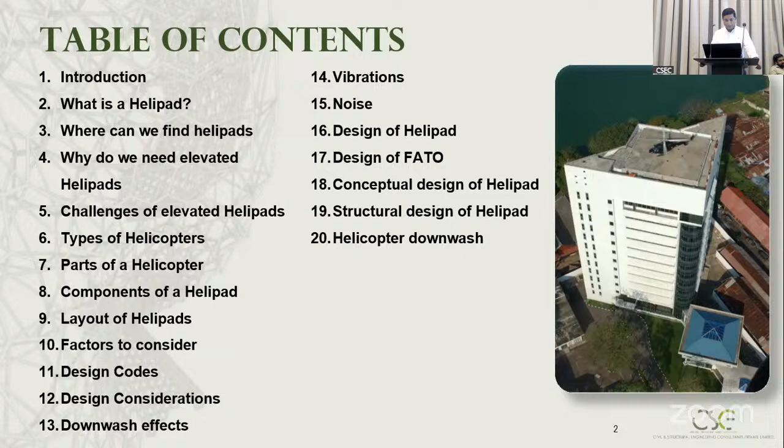Parts of a helicopter. Components of a helipad. Layout of helipads, factors to be considered, design codes, design considerations, downwash effects, vibrations, noise, design of helipads, design of FATO that is final approach and takeoff area, conceptual design of helipads, structural design of helipads, and helicopter downwash.

So let's move into the introduction part. When you look at the aviation sector, there are two types of aircraft available, based on their lift mechanism. The first one we call fixed wing aircraft. The fixed wing aircraft generate lift through forward motion and fixed wing. To operate fixed wing aircraft, you need a runway or airstrip.

For example, from the Sri Lankan point of view, the national carrier, Sri Lankan Airlines, uses A320, A330, A340, and so on. In addition, from the Air Force inventory, AN-32, C-130, and also the jets come under this category, that is Kfir, MiG-27, and so on.

The other category is rotary wing aircraft, basically what we call helicopters. A helicopter generates lift by rotating its wings in a circular motion. The significant difference is the helicopter can take off and land vertically, so there is no requirement to have an airstrip or runway. It needs only a basically flat platform, an obstacle-free area, because it can take off and land vertically.

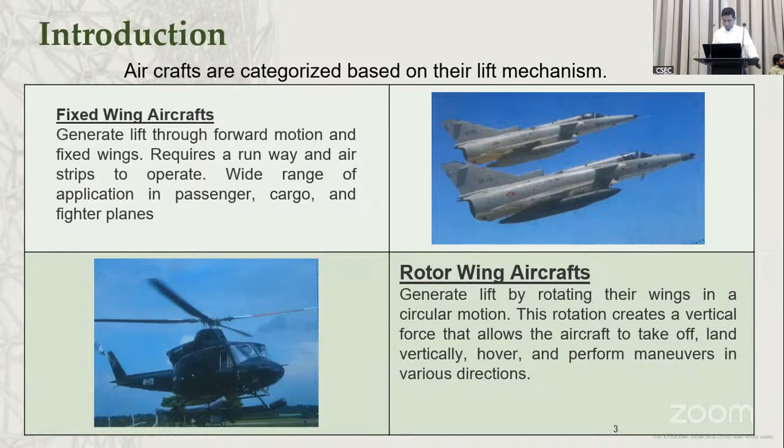Now let's see the definition of the helipad. It is the area designed for helicopters landing and takeoff, generally marked with an H to help the pilot easily locate the area. That is a standard. Generally we mark a capital H letter so that pilots can identify the helipad from a reasonable distance. Helipads are constructed generally with concrete, asphalt, and steel.

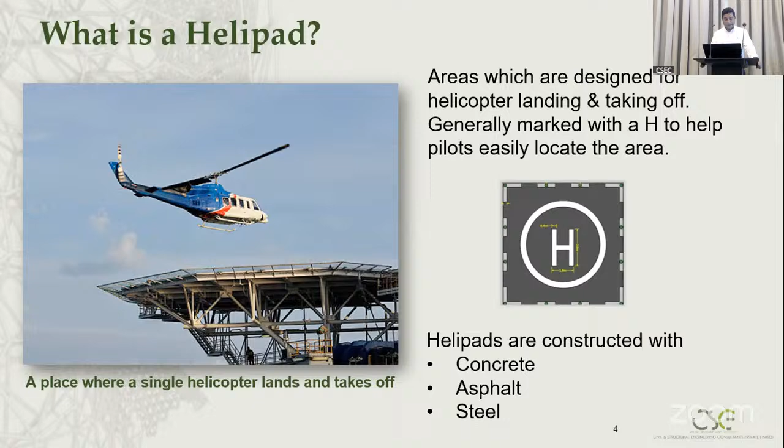Now, gentlemen, we'll see where can we find the helipads. Of course, on the ground. Ground helipads are very popular, and you can find them even in military setups, in the field. We will have a clear area. You can see in some grounds also, for emergency situations, we will land and position aircraft. But today we are going to give more details about rooftop helipads.

Other helipads are offshore helipads, oil stations, and also helidecks, especially on ships. And finally on rooftops. So we are going to discuss rooftop helipads in more detail today.

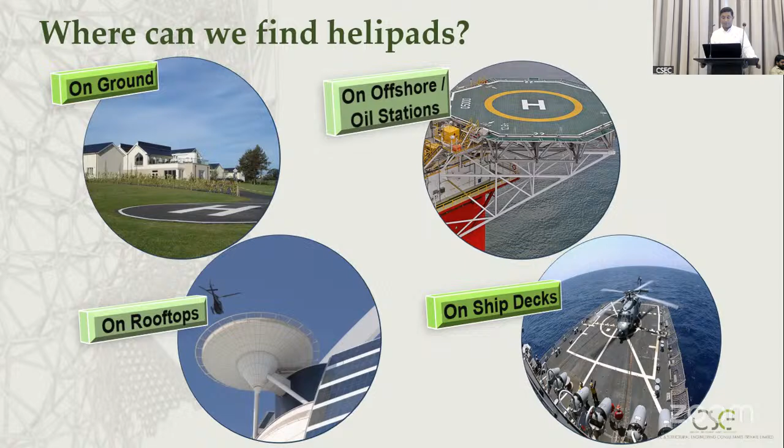So, ladies and gentlemen, why do we need elevated helipads? These are the plus points, mainly the most popular reasons. Due to these things, today's construction industry is very concerned, and rooftop helipads are very popular.

Convenience: direct helicopter access to the building, which is useful in case of emergency situations and VIP transport. If you have direct access to the building, that is a very good advantage, especially for emergency situations, for hospitals and high security zones. This is very important, and also for VIP transport because you have direct access.

Also, space saving. When you are designing a high-rise building in city limits, given the scarcity of land, you can use rooftop helipads. The other thing is security—maximum security with direct access to the building. As I explained earlier, this is very important.

And the plus point is enhanced visibility. Due to the situation of being at the top of a high elevation, it provides great visibility for pilots for approach and takeoff.

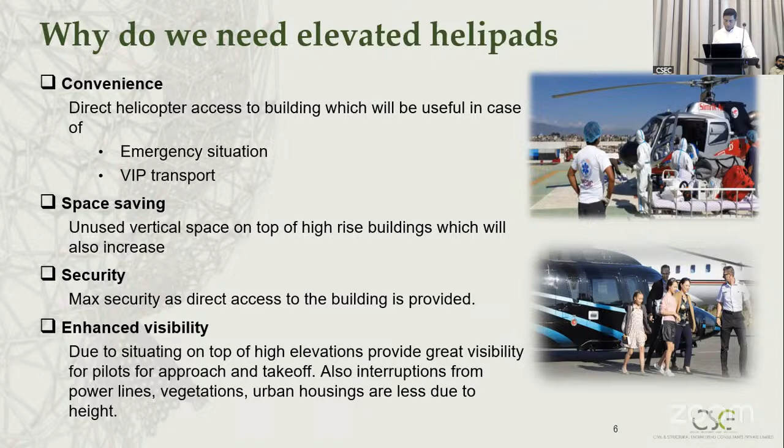Those are the plus points, and there are minus points also, which we call the challenges of elevated helipads. Of course, there are structural challenges, the weight and vibration during takeoff and landing, but I am not going to discuss those because Engineer Shiromal will discuss those things.

Noise and safety concerns: helicopter operations generate considerable loud noise, which can cause distress to building and neighborhood occupants. Especially the helicopter startup produces a lot of noise, and also when taking off and landing they use maximum power, generating loud noise which is a great inconvenience to the occupants of the building as well as the neighborhood. Then the other minus point is airspace restriction.

Generally, we construct rooftop helipads in the city, so there are high security zones also, from the Sri Lankan point of view. There are also regulatory requirements; they give specific flight paths for approach and takeoff, and directions due to certain reasons. For example, you can't fly over the parliament and president's house, so the pilot has to approach the helipad from a different direction.

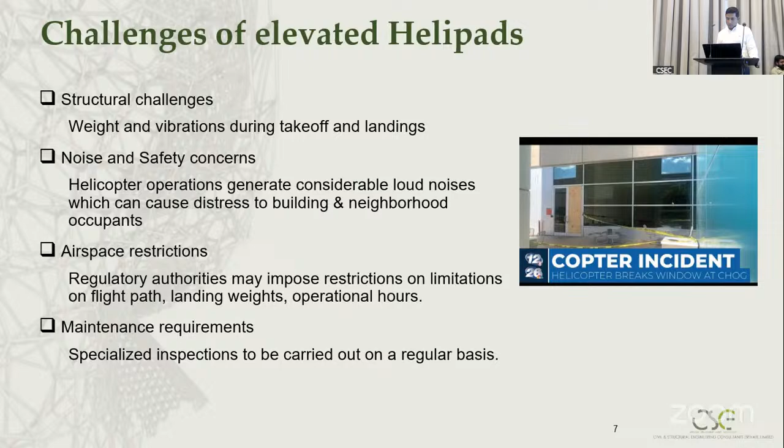This is also very important, because when designing a helipad, you should know what type of aircraft you are going to use, because the specifications differ from helicopter to helicopter - weight difference, speed difference, and a lot of things to consider. So you should have at least some idea about what types of aircraft are available in Sri Lanka and what the common helicopters are. I will go through the very common helicopters in Sri Lanka at the moment.

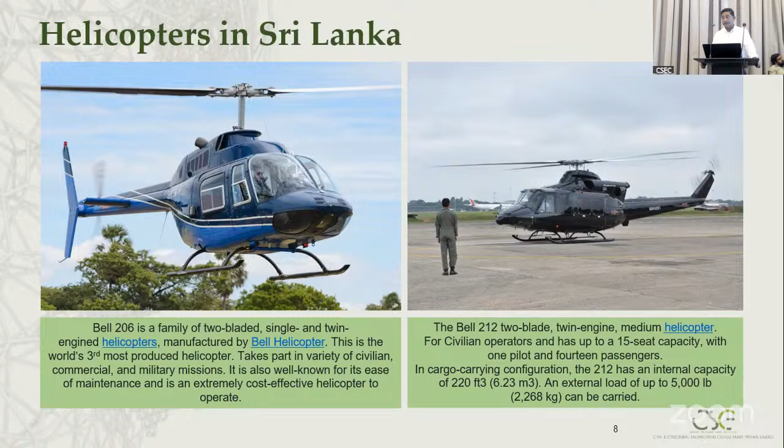At present, you can see the Bell 206, the single engine aircraft, also called Jet Ranger. Then there's the Bell 212, a passenger and cargo aircraft, again a twin engine aircraft. Then the Bell 412, again a passenger aircraft, generally used by the Air Force for VIP flying and casualty evacuation. And also the Mi-17, a big large Russian-made helicopter - this is a cargo helicopter actually, but a VIP version is also there. So about four of these come under the Air Force inventory.

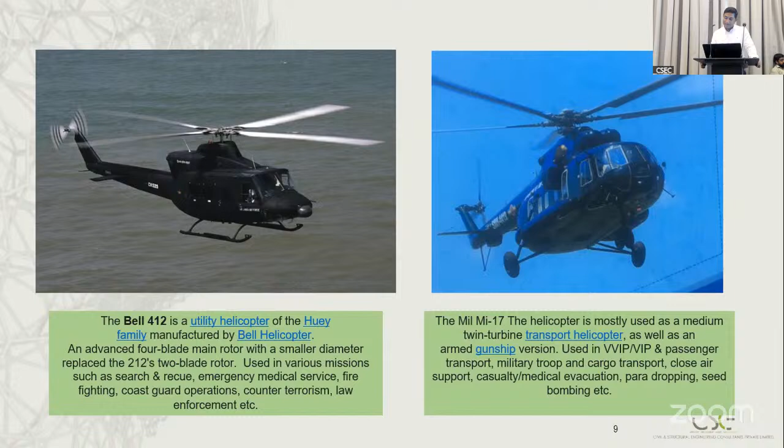In addition to that, the civil sector also operates some helicopters, so we have to think about that also. There's the Robinson 66 passenger helicopter, again a single engine aircraft, and Eurocopter helicopters also, which we call Airbus helicopters. You should know this information, because when designing a helipad, you should know the specification of the helicopter; otherwise it's very difficult.

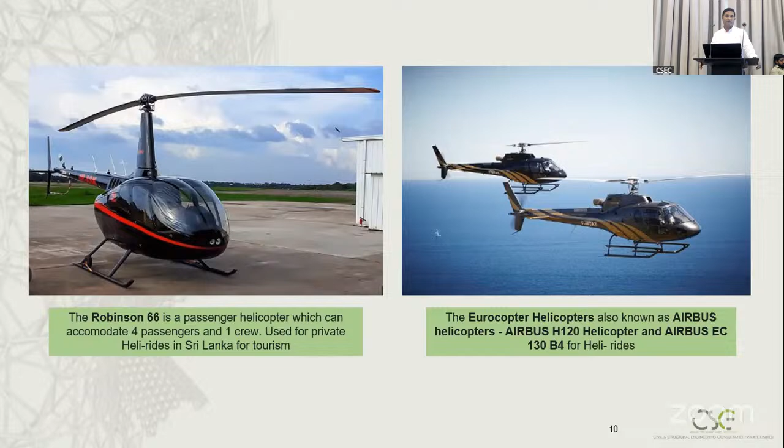Now we'll go to the parts of a helicopter. This is also very important because some words we use may be new to you, and I want to refresh your mind before you go to the design part, so that you will easily understand Mr. Shiromal's part.

These are the basic parts of the helicopter. You can see the main rotor - generally the main rotor may have 2 blades, 4 blades, 6 blades, or 8 blades, depending on the helicopter type. The main rotor is connected to the rotor mast, and the rotor mast is connected to the helicopter main body. Then you can see there is a place called the cockpit, where the pilots are, and all operations are done through that area.

Then under the fuselage - the belly, or the body, you can say - you can see the landing skids. All the weight transfers through these landing skids to the helipad. Sometimes you will get landing wheels as well, depending on the aircraft. As I showed you, the Mi-17 has wheels, whereas the 212 has landing skids. So accordingly, you can calculate the weight for your design work.

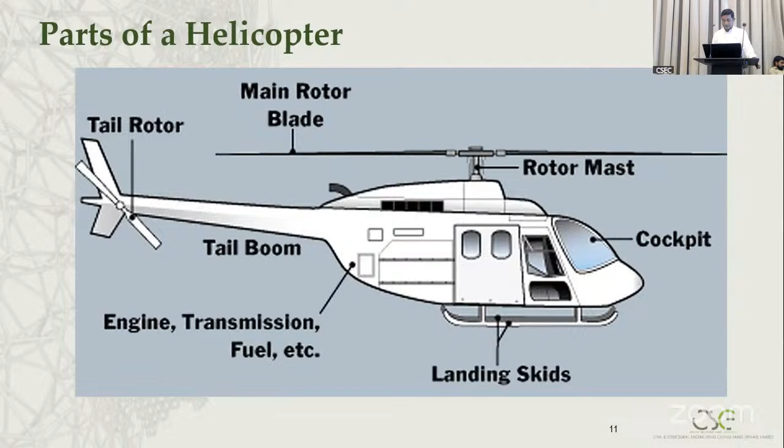Now, gentlemen, we'll go through the components of a helipad. Basically, as I mentioned, it's an obstacle-free area. For easy understanding, you can see 3 squares. Outside the square, you can see something called a wind sock. The wind sock is some kind of apparatus to identify the wind direction for the pilot.

Generally, the aircraft will take off and land against the wind, so wind direction is very important. That is generally installed outside the safety area. Then you will have the safety area. Within the safety area, you can see another square called the final approach and takeoff area. The pilots will approach this square from a reasonable distance before they touch down.

Then inside the final approach and takeoff area, you will have another square called the touchdown and lift-off area. When the aircraft approaches through final approach, it comes to the touchdown area, and on takeoff it goes through the takeoff area. Inside the touchdown and lift-off area, you can see a circle, called the touchdown and positioning circle. Finally, the aircraft will come to this circle, and you can see the letter H as I mentioned earlier. The pilots will touch down in this area, and the aircraft will be positioned there.

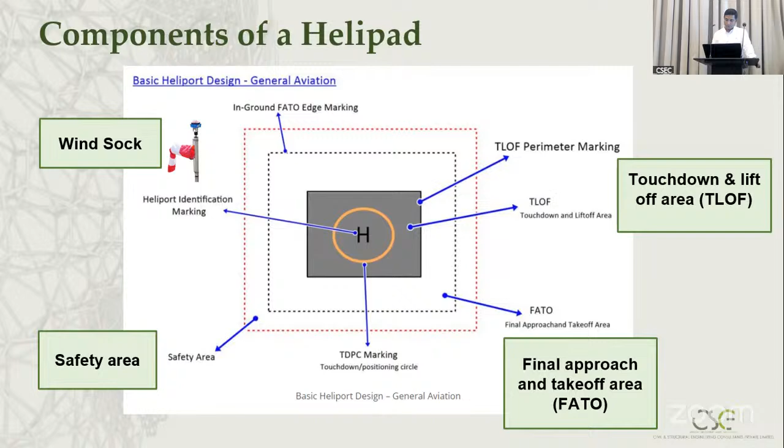Now let's see the layout of a helipad. This is also very important. Basically, as I mentioned, it's the obstacle-free area. If you take the overall length of the helicopter as D, the safety area should be 3D, 3 times the helicopter length. Inside the safety area, you get the final approach and takeoff area, that is 2D. Then finally D, the overall length of the helicopter, is the aircraft positioning circle, where the letter H is also located.

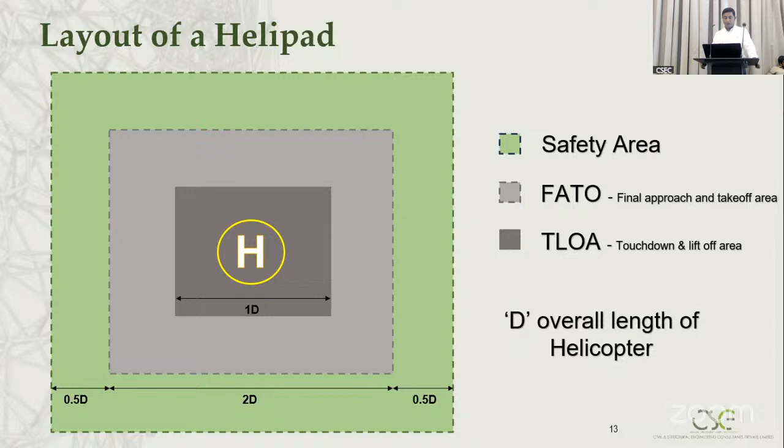So when designing the helipad on rooftops, these factors must be considered. These are the main factors. There are some other factors also available, but these are the main ones to be considered when designing a helipad on rooftops: markings, lighting for night flight operations, fire safety, and picketing points. On the right side of the picture, you can see the Bell 412 aircraft positioned at the former Air Force headquarters building at Slave Island.

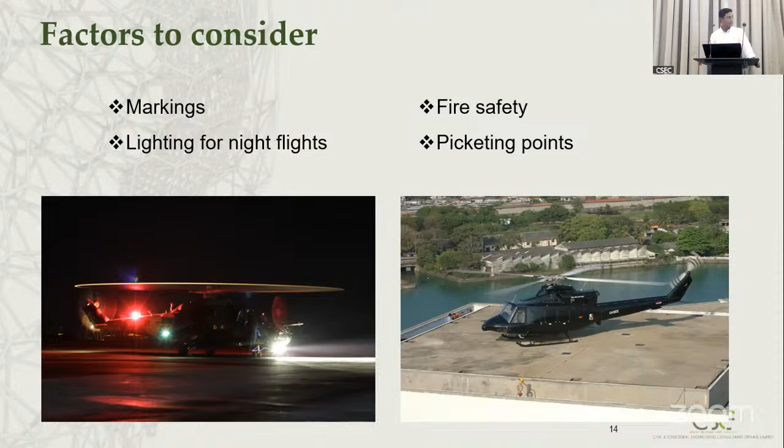And also some areas to operate firefighters and other equipment must be considered. Also, not in Sri Lanka, but in other countries, they use sprinkler systems for helipads. It's a bit expensive, but now it is commonly used.

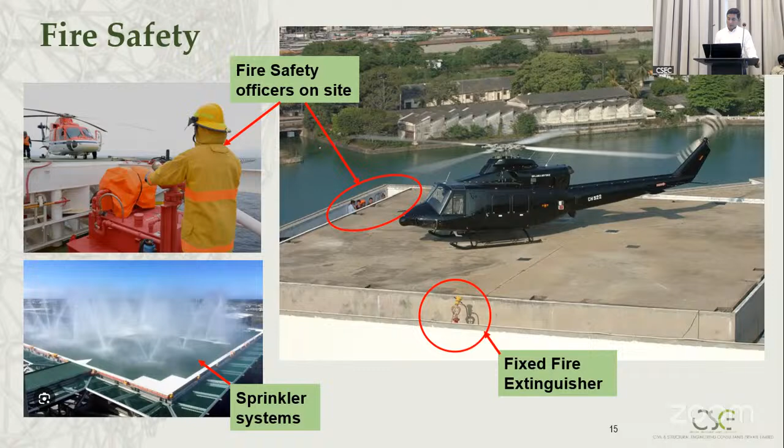Then, the picketing point. As you know, sometimes the aircraft may come, touch down on the rooftop helipad, and take off again. But sometimes we have to keep the helicopter there for a certain time, maybe due to some snag or security reasons. In that case, you keep your helicopter positioned on the rooftop, and it becomes very critical due to winds. So you have to have picketing points, because in turbulent situations the aircraft could be moved, and bad effects can result from high winds. In that case, you have to anchor your aircraft to the ground, to the helipad.

So this requirement, the manufacturer will give the layout of the picketing points arrangement according to the aircraft, because you can't anchor the aircraft as you want. Some hard points are available in the helicopters, sometimes only fiberglass and plastic, very soft material parts are there. So you have to identify the hard points, and according to the hard points, they will give the picketing point arrangement. The picketing points are basically the anchoring point. So any aircraft you design for helipads, you have to refer the manufacturer specification for picketing points specifications and the picketing points layout.

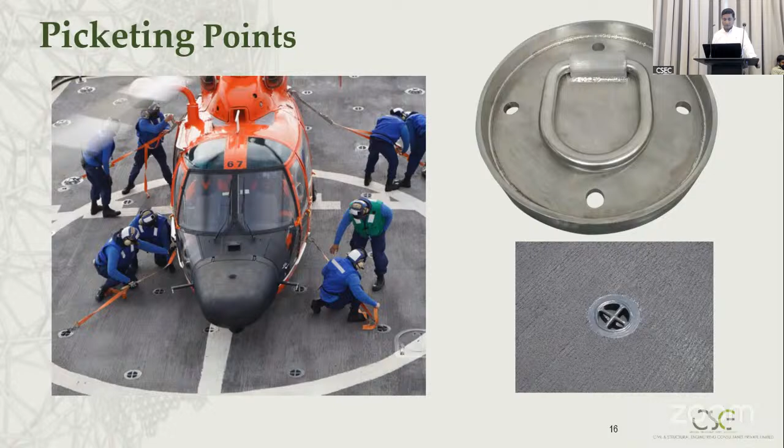Another thing is the markings. The marking is also very important. This is the regulatory requirement, so you have to mark the helipad as per the regulatory requirements. These are the basic markings: the helipad name, you can see any color, ICAO. For example, this indicates ICAO.

Then you can see touchdown and lift-off area marking, generally a white line 30 centimeters wide. Then maximum allowable mass, the all-up weight, that is the maximum allowable. All-up weight means the fuel, aircraft weight, then the passenger and cargo weight included. That is the maximum weight you can land on the rooftop. As a design engineer, we should know we are going to design below this, in this case less than 6 tons. Then helipad identification marking in white H, so the pilots can easily identify the helipad from a reasonable distance.

Then touchdown and lift off area perimeter lights also there, that is for night flight operations. Then touchdown marking in yellow circle, that is the final aircraft positioning area, and touchdown light and lift-off area also there, that is again floodlights for night plane operation.

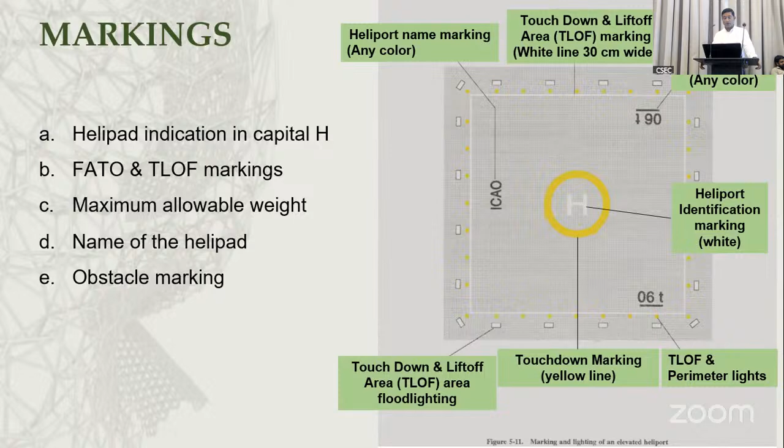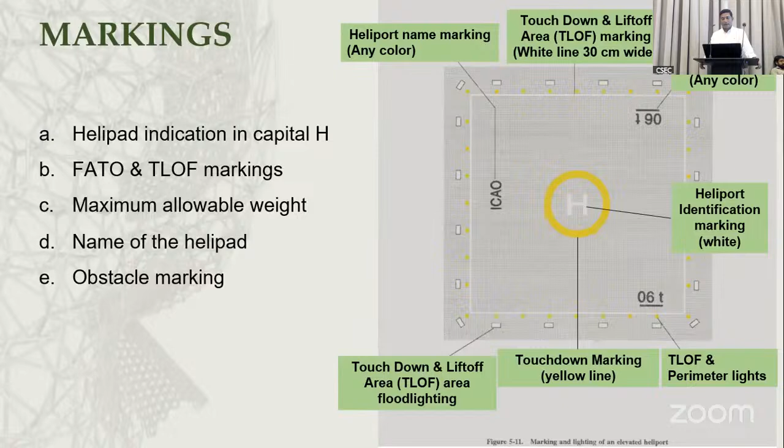In addition to that, you have to have some obstacle lights and obstacle marking. If there are obstacles, you have to mark and indicate the obstacle lights in the vicinity of your helipad, maybe tall buildings, towers, etc. Accordingly, you will have a red light, and then the pilot knows the power lines and other obstacles.

So night lighting, this is also very important. Sometimes you have to land in the night, and for night plane operation you should have some illumination system. In that case, we generally use the heliport beacon. At night, you can switch on the beacon, then the pilot can easily approach the helipad and identify it from a reasonable distance.

Then illuminated windsock. As I mentioned, the windsock is a very important instrument for landing and takeoff, so for night operations you have to have an illuminated windsock there.

Then helicopter approach path indicator, HAPI, that is for instrument flying. Though the pilots usually operate the helicopter visually, sometimes we use autopilot or something like that. Then the approach path indicators are very important, so according to those lights, the pilots can approach the helipad without any problem. Like sometimes with winds or in the mist, with those floodlights, pilots can easily approach the helipad.

Then final approach and takeoff area, and touchdown and lift-off area indicating lights. You can see the green light, then the amber lights also there. That is the final approach light system, final approach and takeoff area lights, and touchdown and lift-off area. There's a small video showing how the pilot can land at night with the indication lights.

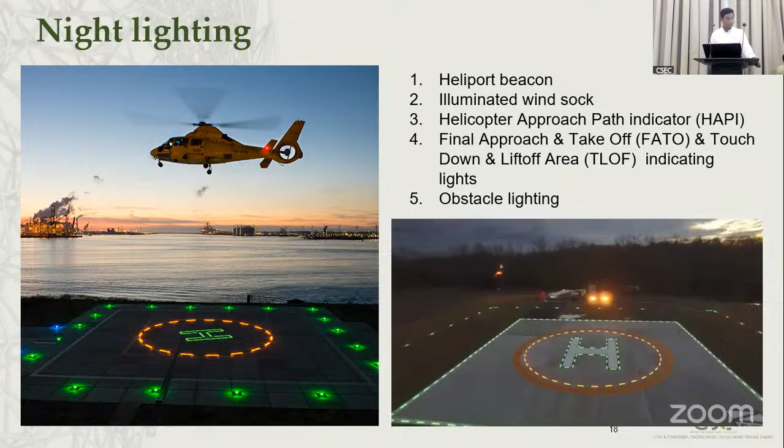These are the standard codes for construction of helipads. We have to follow certain guidelines and regulations when designing helipads. Generally we use the International Civil Aviation Organization, ICAO standards, ICAO Annex 14 Volume 2, that is mandatory. You should follow those codes when designing helipads.

And the Federal Aviation Administration, FAA standards, USA, FAA Advisory Circular 150-5390-2B, Heliport Design, that is specially for heliport design, meaning number of helipads. Heliport means number of helipads, maybe 2 or more, we call it a heliport, but helipad means a single one.

Then European Union standard, European Union Aviation Safety Agency, CS HEL. Then National Fire Protection Association, NFPA 418, standard for heliports again, and International Organization for Standardization, ISO, British Standard BS 6165, BS 8110 Part 1, Code of Practice for Design and Construction, BS 6399 Part 1, Code of Practice of Dead and Imposed Loads, BS 5950 Part 1, Code of Practice for Design of rolled and welded sections.

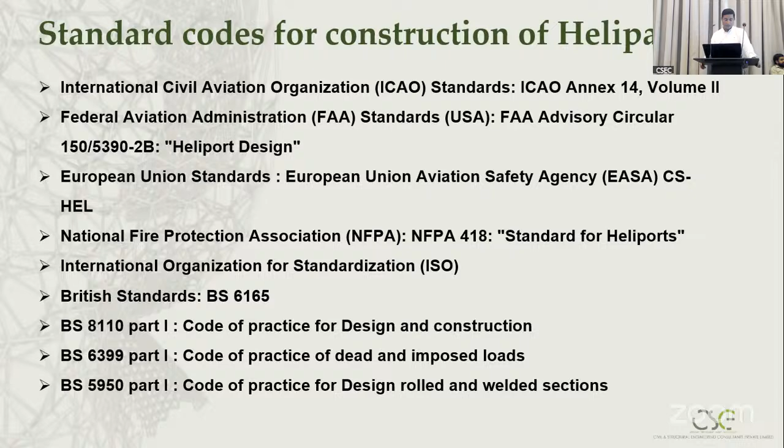In addition to that, you can use other design codes also, and you have to follow the civil aviation regulations, and also get some information from the Air Force as well when you are designing helipads in Sri Lanka. With that, I will come to the end of my part.

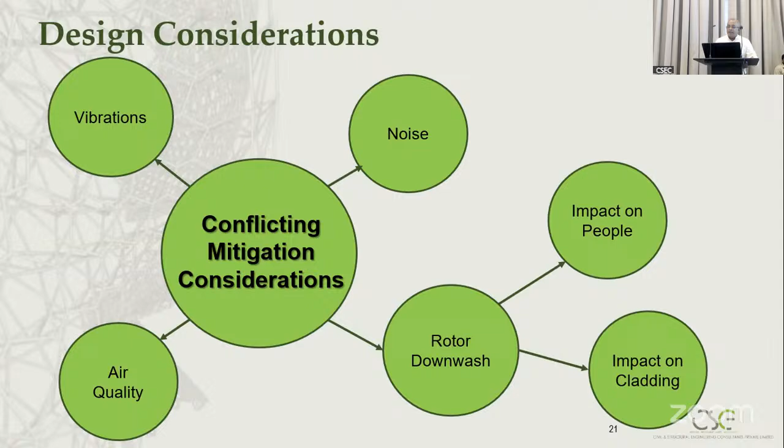So basically, in a helicopter, there will be noise, and the pilot should be a very experienced person to operate, since it is a very small area.

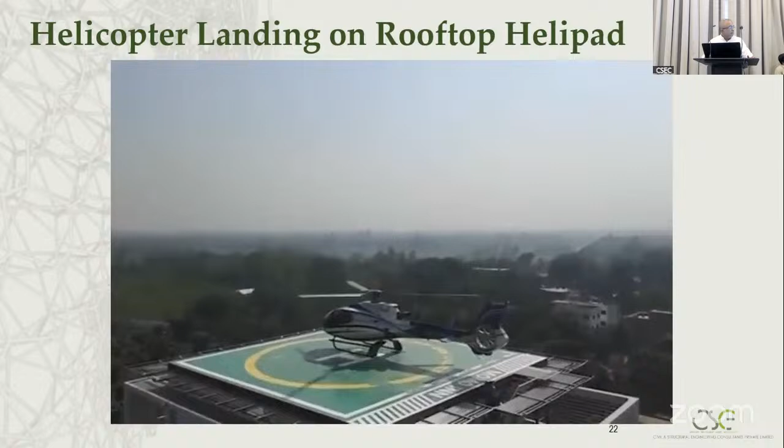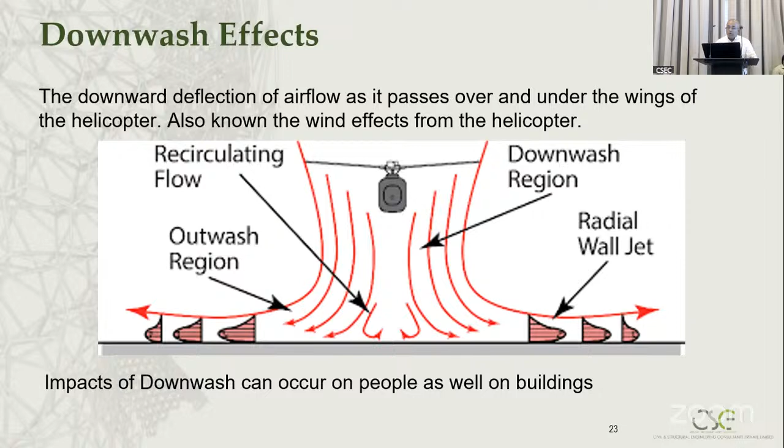So when the helicopter approaches, because of the rotor turning, there is a downwash. It is much more than wind-induced—it is a forced downwash. Because of that, we have pressure on the slab and also the surrounding areas. So there can be many disasters: people can be blown off if they are not in safe areas, and the cladding can be blown off. Any loose particles not fixed can be blown off.

So there are many things we need to look at when designing structures. For instance, if we design the cladding for wind load—if there is a helipad, the top part, due to the downwash, we will have very high wind pressures at the top facades. If you design based on BS standards, you might get a pressure of about 2 kilonewtons per meter square, but actually, due to the downwash, we can get about 5 to 10 kilonewtons per meter square wind pressure at the top part of the cladding.

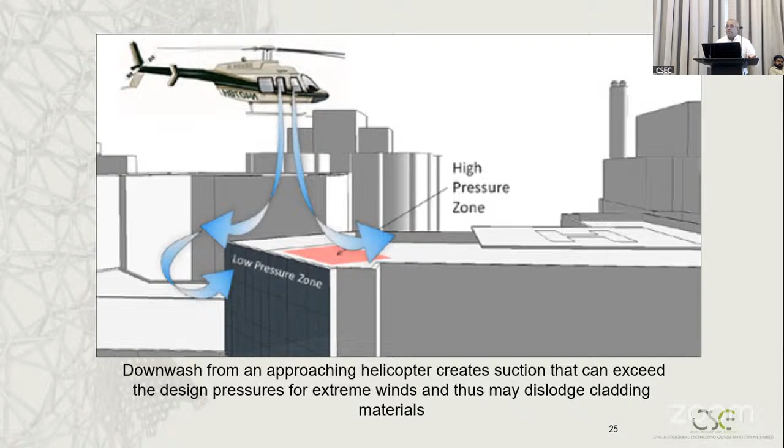So we need to understand these areas, and the spread can go up to 200 feet radius. So this is very important to understand—all the structures within that area we need to look at.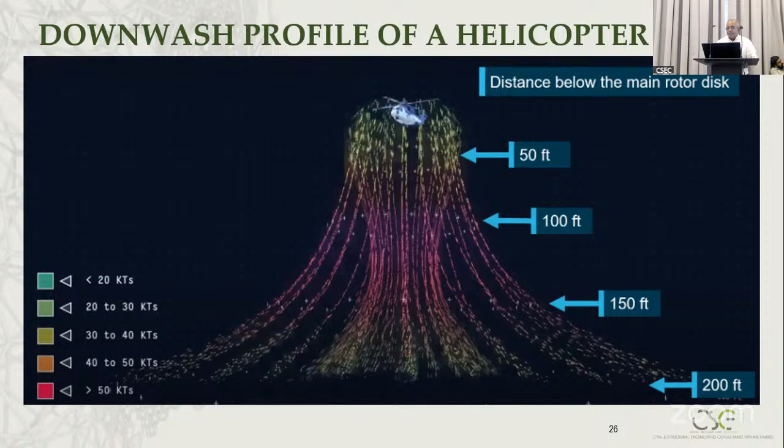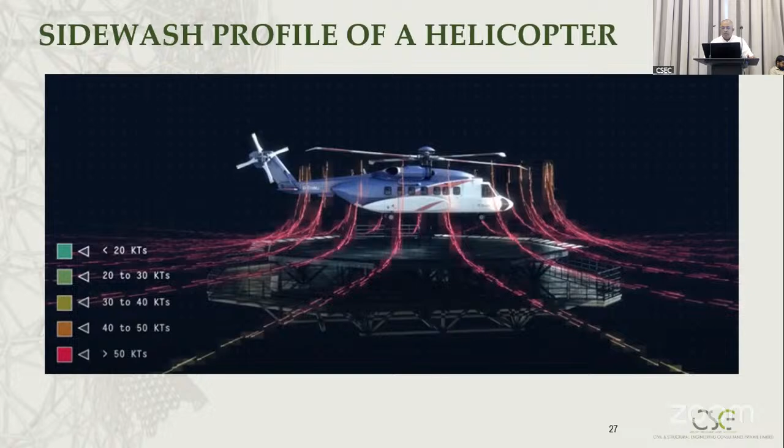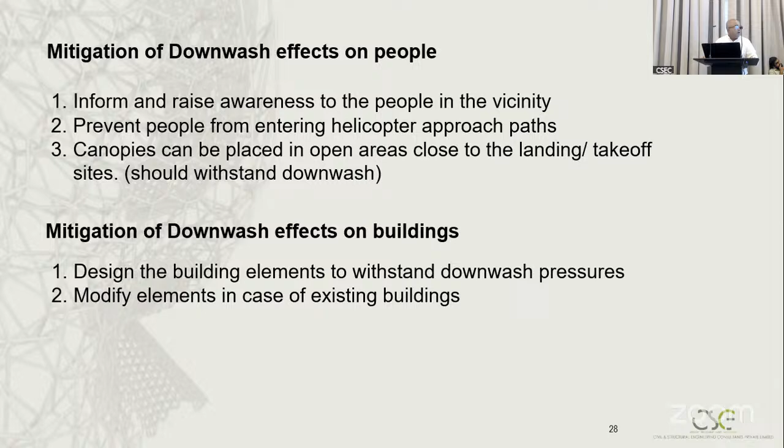Side wash is also another issue where people can get affected if they are very close. People should not go very close to the helipad until it is totally shut down. So downwash information should raise awareness among people in the vicinity—basically preventing people from entering the helicopter approach path. Canopies and open spaces have to be very well designed, and all these forces have to be taken into account.

Also, sometimes the helicopter can rotate, which can give vibration to the building. Generally, the frequency of vibration is rotor speed multiplied by number of blades—Mr. Udula told us it can be 2, 3, or 4 blades. Based on that, you can estimate the frequency. If that frequency matches your slab frequency, then it will go into resonance. We need to make sure that doesn't happen.

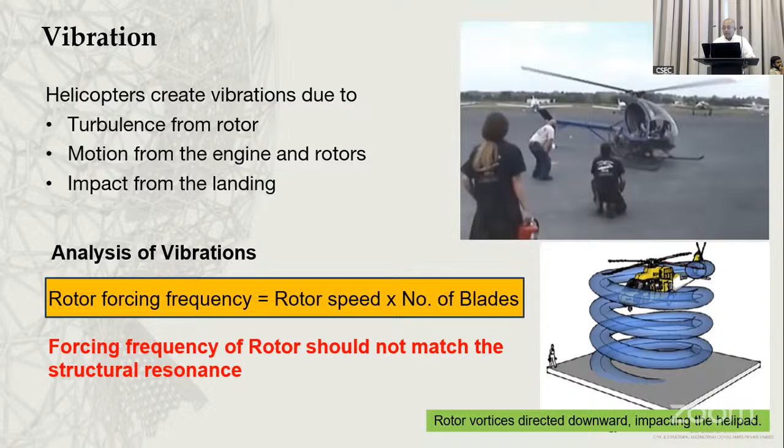So although we have a structure for the helicopter, we cannot design assuming the helicopter will land only at the H symbol—it can go up to the edge. You need to consider all possibilities when designing for the helicopter, since it is not in a particular place. So for bending moment and shear force, you have to get all the critical locations and look at all the possibilities that can happen.

So basically, you can calculate the floor vibration in the analysis, and then calculate the damping and the natural frequency of the structure, making sure the rotor frequencies are not matching this frequency. If that happens, you have to have a tuned mass damper to mitigate and damp the vibration.

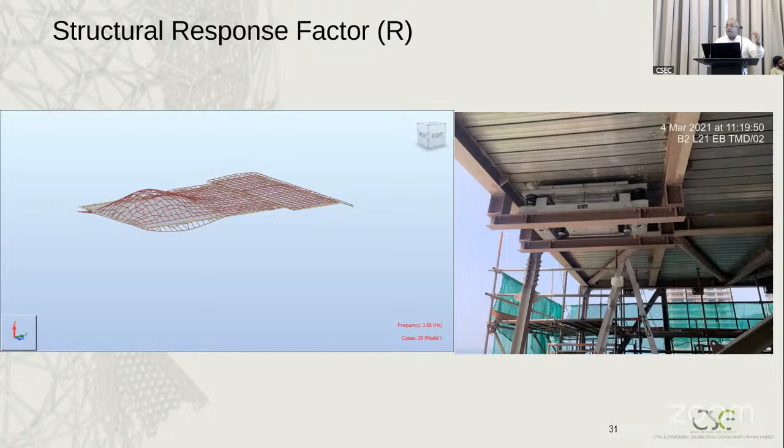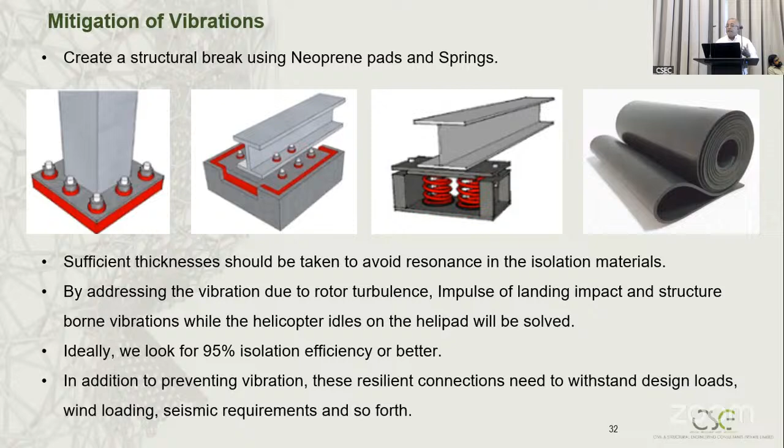As Mr. Udula's presentation mentioned, there can be a separate concrete slab, which is easy, or you can have a structure above the slab. If that is the case, you need to isolate the vibration transfer into the slab, using neoprene pads or springs to isolate that vibration to the building, like a bridge.

So basically, noise is another issue. It is not directly structural, but it also needs to be catered for. If it becomes a nuisance, the occupants under the building will complain. Let's say you have an office under the helipad, if the helicopters create noise, you have to treat your glass, using glass insulation to reduce the noise gain into the building. So that is another aspect we need to consider.

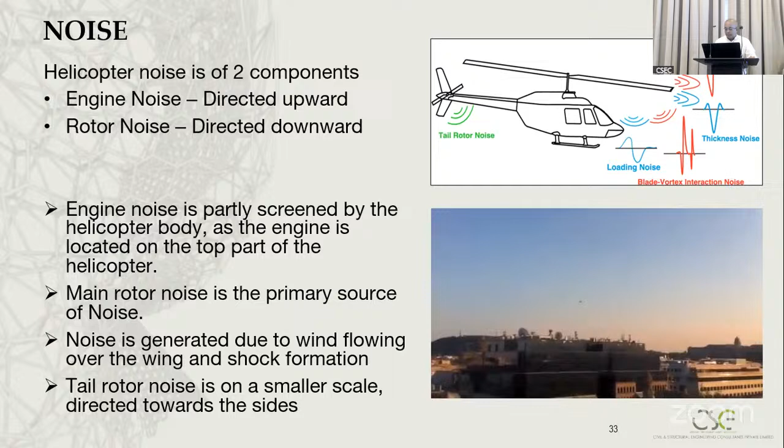So you can do a full range analysis while considering the approach and takeoff, and examine the noise levels using simulations, trying to understand what kind of noise is going to transmit to the building.

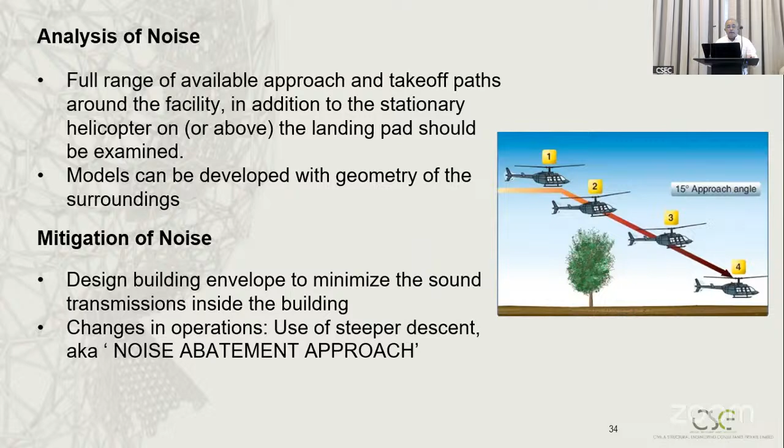And air pollution is another issue that we get, especially at the ground level, but in the upper level also there's a possibility of air pollution. Most of the time it produces NOx and monoxides, which are hazardous to us, so we need to take action so that this will not get into the building.

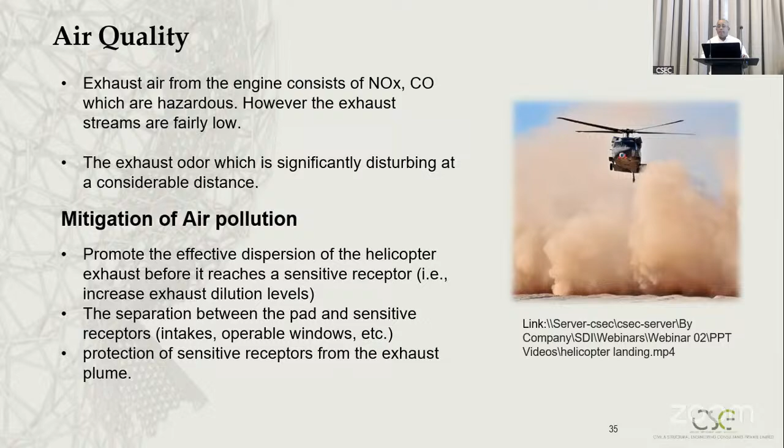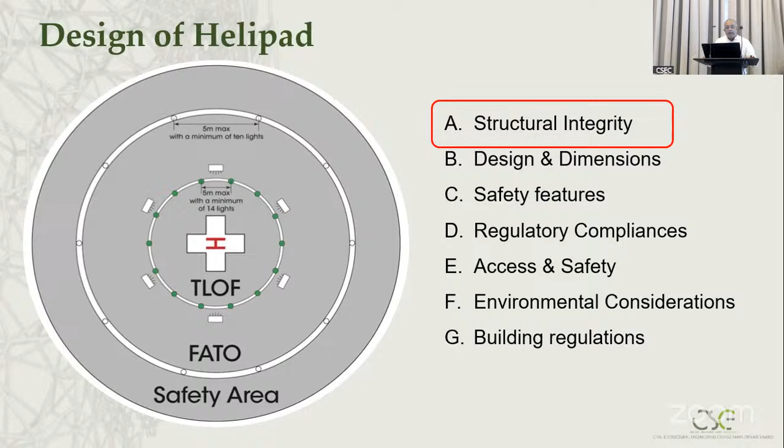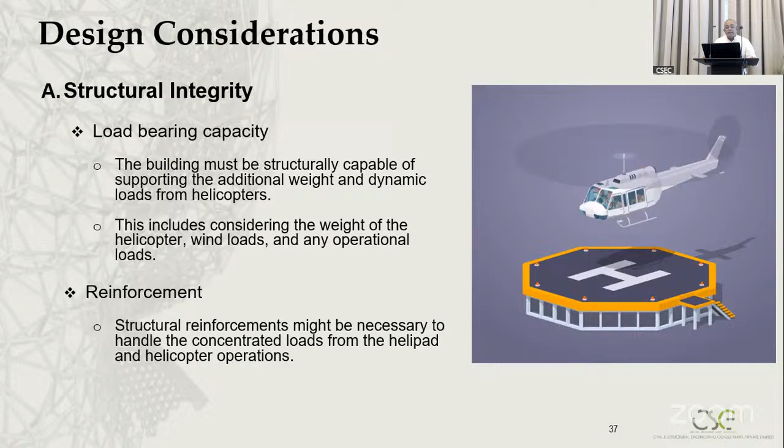So when you design this helipad, as Engineer Udula said, we have the touchdown and lift off area, then the approach and taking off areas, and the safety areas. So basically, you need to calculate the load bearing capacity of the slab in these areas and then provide the reinforcement.

Say for instance, the helicopter can be around 10 meters, then your takeoff approach area will be around 20 meters, and then you have to have a safety area of another 10 meters. So basically, your helipad will be around 30 meters by 30 meters, like a total building. Generally, a building is around 25 by 25 meters, so 30 meters means the total building area you need to have for this.

So it should be clear, there cannot be any obstacles like lift water tanks or anything like that - it should be above all. And then there should be staircases for people to go down; if there is a hospital, you need to have lifts to take people down. So it should be clear, 30 meter by 30 meter, based on the helicopters that you look at - generally, if I can remember, it's around 10 meters.

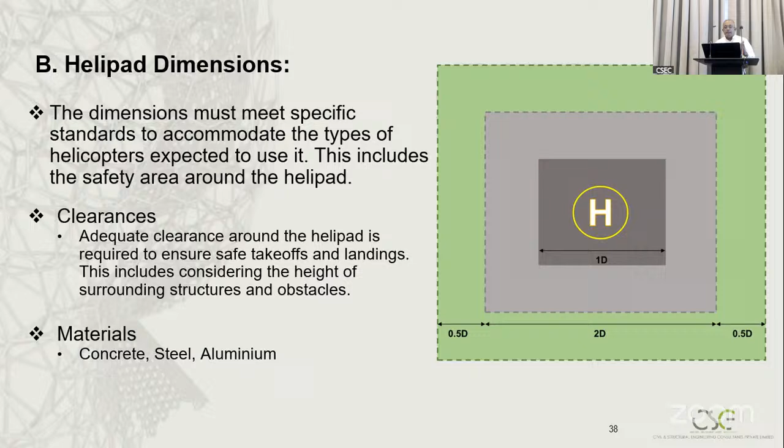So basically, as I said, the final approach and takeoff area, and the lift-off area - when the helicopter reaches and touches down, it is not only producing a static load, but also a dynamic load. Normally the speed that it comes in and lands is around 1.8 meters per second, which is like if you're traveling in a lift in a 10-story building, that's the kind of movement you get. In case of an accidental situation, it will be around 3.6 meters per second.

So that is almost double, so we need to factor all that into our design - dynamic factors, so that both possibilities are covered. 3.6 meters is similar to the World Trade Center, where the lift speed is 3.5 meters - that is the kind of speed it can come in during an accidental mode.

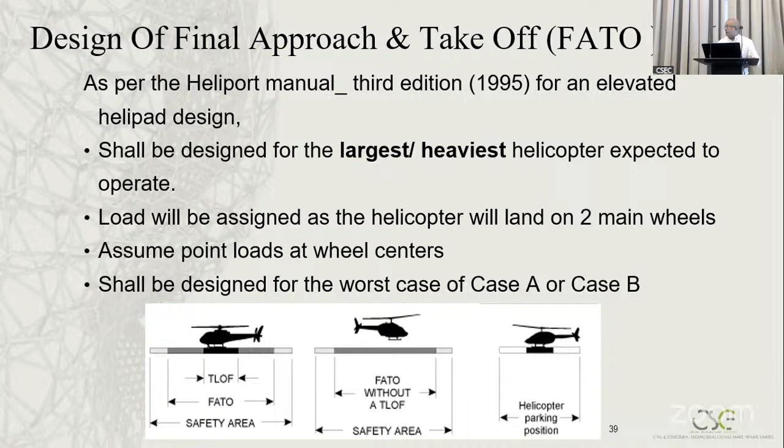So basically, structural engineers are working with unknown forces and unknown loads, so obviously we put in safety factors. In order to cater for all these loads, ICAO, the International Civil Aviation Organization, has recommended these values: for ultimate design, you have to have a 2.5 safety factor. Live load we use 1.6, dead load 1.4, wind load 1.4.

So there are two cases that we normally design for superimposed dead load: case A is design load for the helicopter landing area, and the other one is superimposed load case B, which is helicopter at rest. When it approaches that area, we have to have a particular superimposed dead load, and then for the helicopter at rest, we have case B.

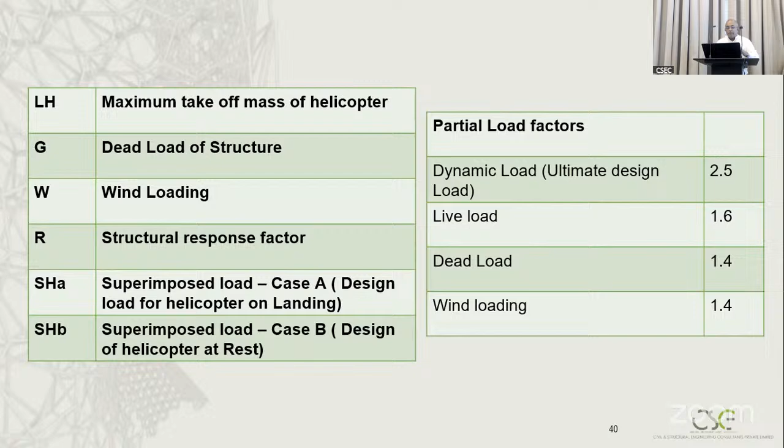So LH means the weight or mass of the helicopter. Because there can be resonance, there is a resonance factor for the load. So you have 2.5 dynamic factor, and the mass of the helicopter is around 13 tons, let's say 10 to 15 tons based on the helicopter. There are charts to get the maximum helicopter you generally design for, based on the maximum one available in the country, and the possible load that can come to the helicopter area. Then you have an additional dynamic factor, generally around 1.3, so you multiply by two factors.

For lateral load, when the helicopter moves, there is a lateral traction load considered as half of the weight of the helicopter, multiplied by the safety factor. So overall, superimposed dead load can be around 1.5 times the most superimposed load, generally 0.5 kilonewton per meter square.

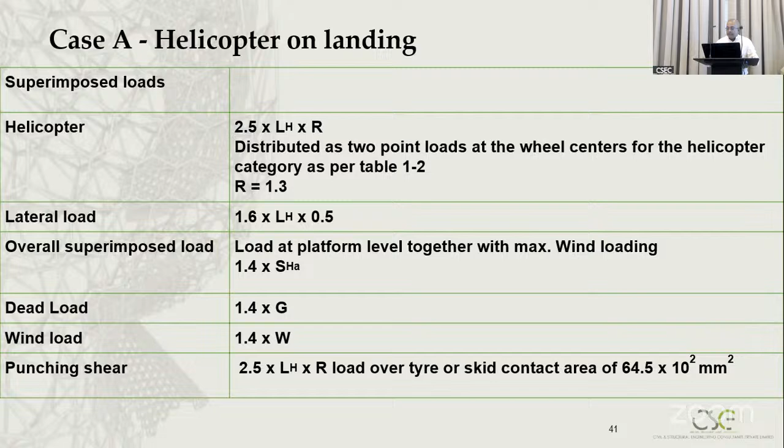For punching shear, sometimes you have skids and also tires. The minimum area specified is 64.5 into 10 to the power 2 square millimeters. That is the area we need to look at for tires or skids. So basically, you calculate the load and then divide by the area, and that gives the pressure coming onto the slab.

For the helicopter at rest, since it's not dynamic, you just calculate the area, the load, the self weight, and multiply by the factor. You can also consider a possible superimposed load coming onto the slab, minimum 0.5 kilonewton per meter square.

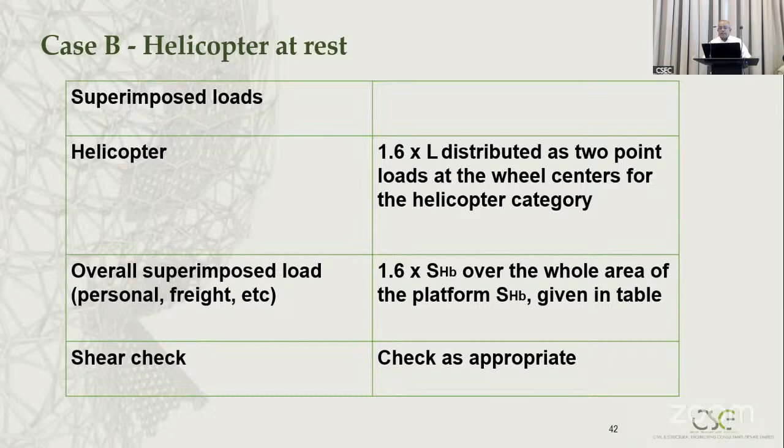Shear check is done as appropriate, similar to that. So these are the loads for different categories of helicopters, which can go up to 27 tons. But I checked with Engineer Udula, and the maximum available is around 13 ton helicopters. So you have these superimposed loads given in this chart, and you can use those values to calculate.

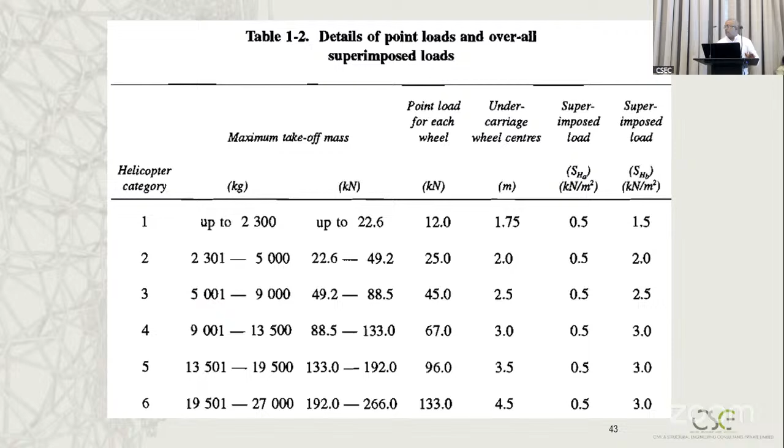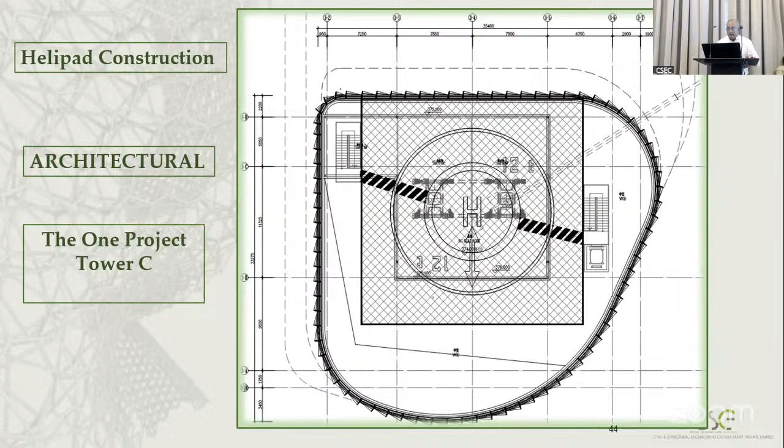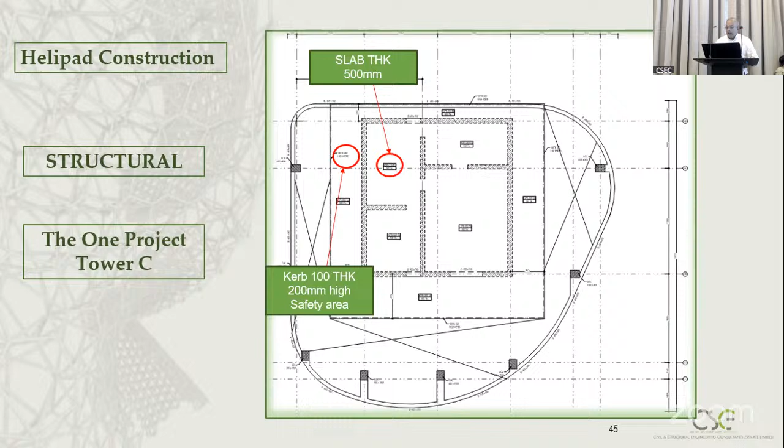This is a case study we did. Tower C wanted a helipad, so we checked and used a 500 millimeter thick slab for the building. This is the typical calculation we used based on ICAO standards, and if you look at these, it's around 10 to 15 kilonewton per meter square static load.

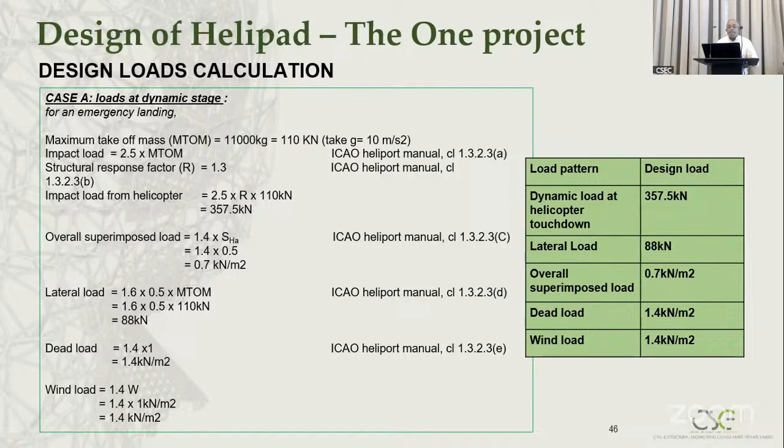These are the typical calculations, as I explained, for case B when the helicopter is at rest. So the design static load here uses an 11-ton helicopter, where the static load is 176 kilonewton, overall superimposed load 0.7, dead load 1.4 kilonewton, and wind load 1.4 kilonewton.

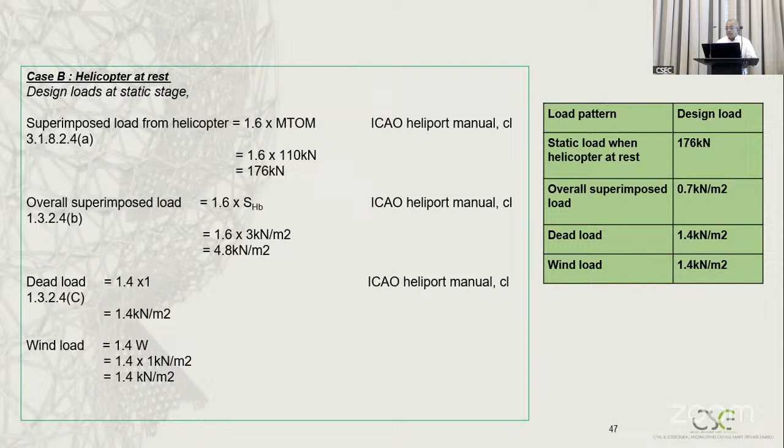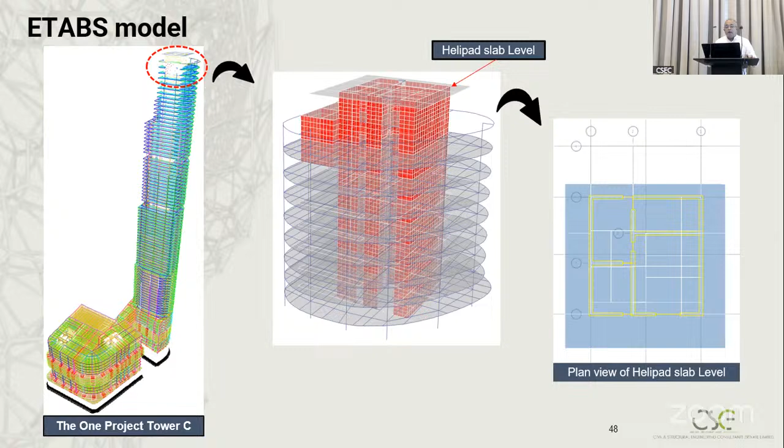So what you normally do is analyze the slab. It's situated on top of the core, and you put the loads, and look at the deflections at service load case A, case B, and also place the helicopter at different areas to see the worst scenario.

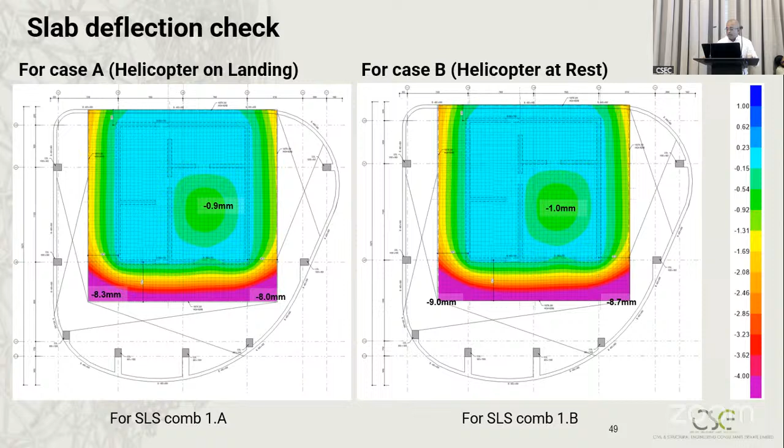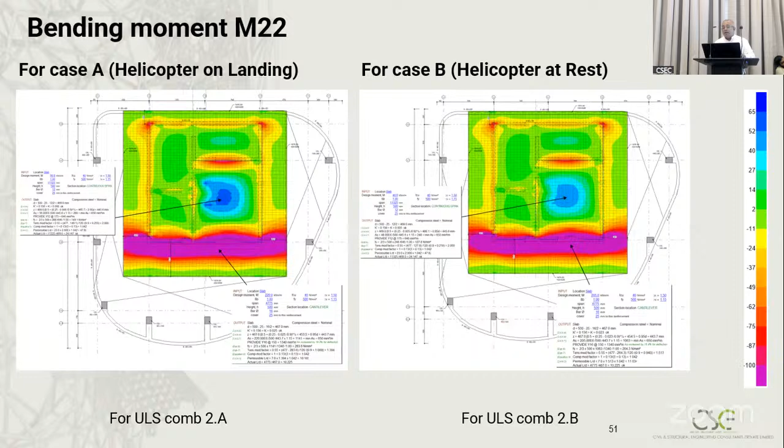Then you calculate the bending moments, M11, M22, for case A, case B at different combinations. Finally, you calculate the shear forces, again looking at the worst scenario to calculate the shear forces.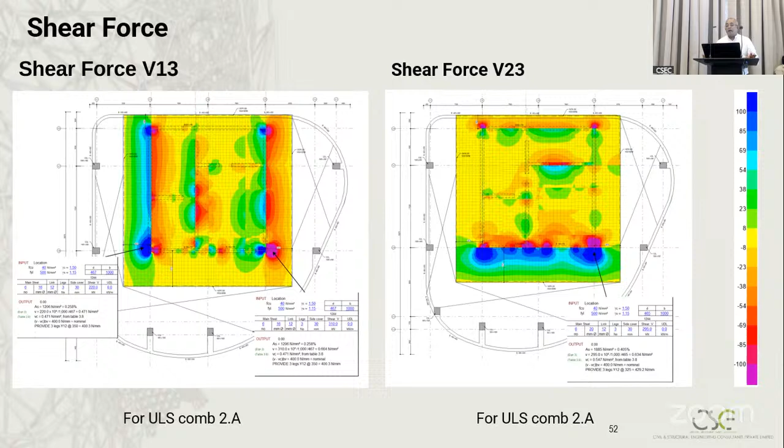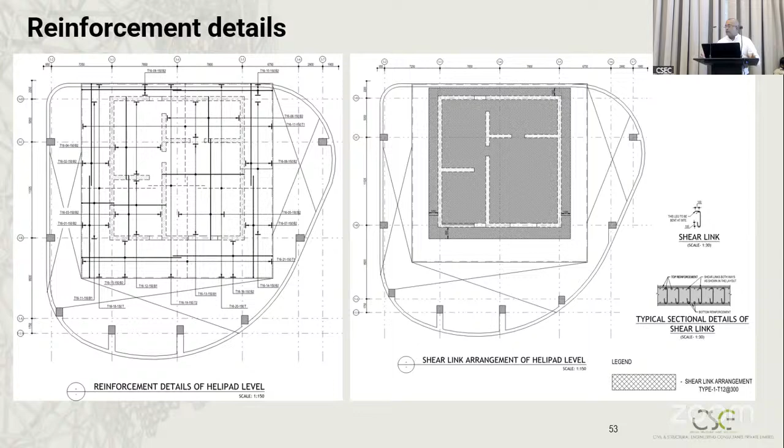Then we provide the reinforcement, and you can see shear links are provided throughout the slab, to make sure there won't be a shear failure in the slab because there are so many scenarios. Thank you very much.